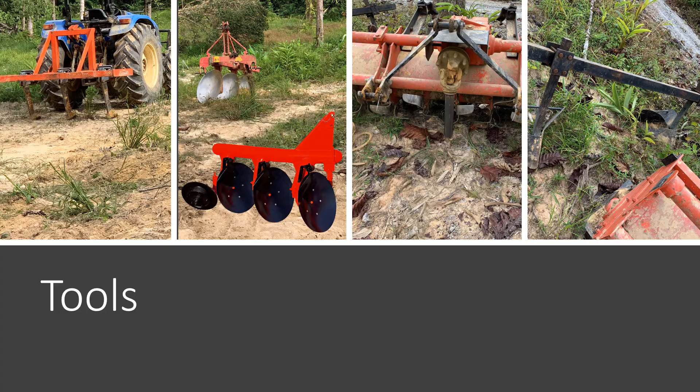The last one here is used in order to make a bed, to make a ridge. It's called a furrow ridger - the furrow ridger is used to make that furrow at the side of the bed. So you determine your size of bed, and you can adjust the width between these two blades. The width of the furrow is fixed because the blade here is fixed, but the size of the bed can be adjusted based on the width between these two blades. You'll see later on how this is going to be used.

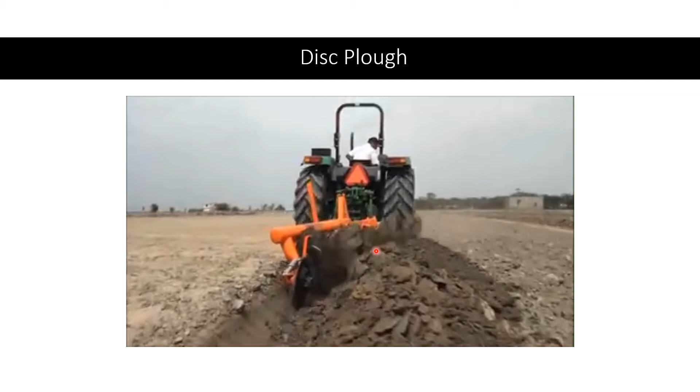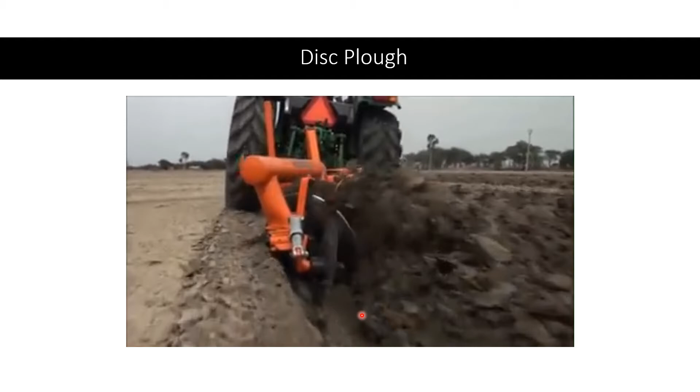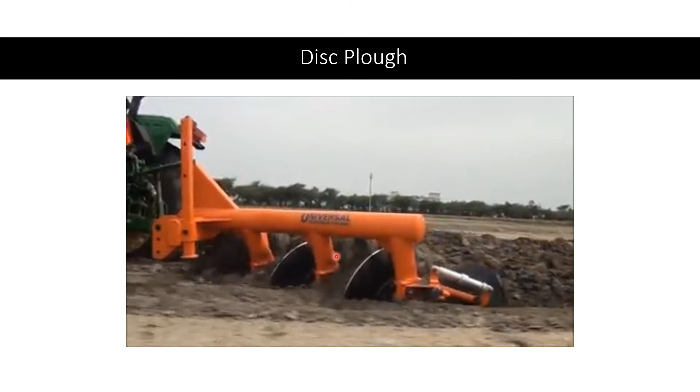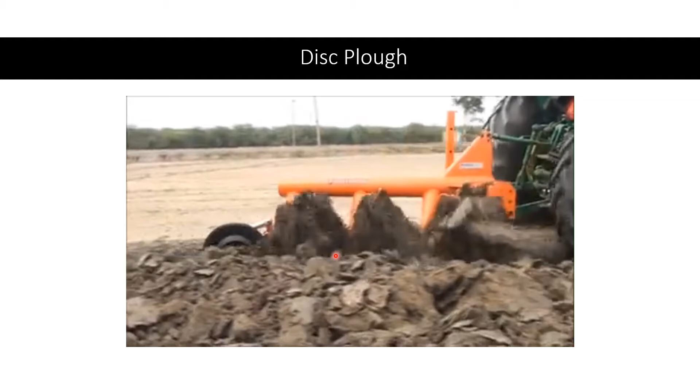So in this video, you can see how the disc plow works. It works by overturning the soil and digging - it digs and overturns the soil and breaks it down. If there are still some roots inside the soil, they will be cut off at this point, but not all. Most of it will be cut off and can then be easily removed by the chisel implement. You can see in this video how the soil is being overturned and dug.

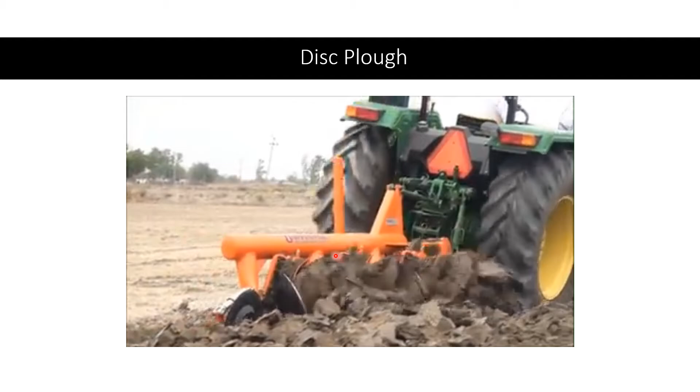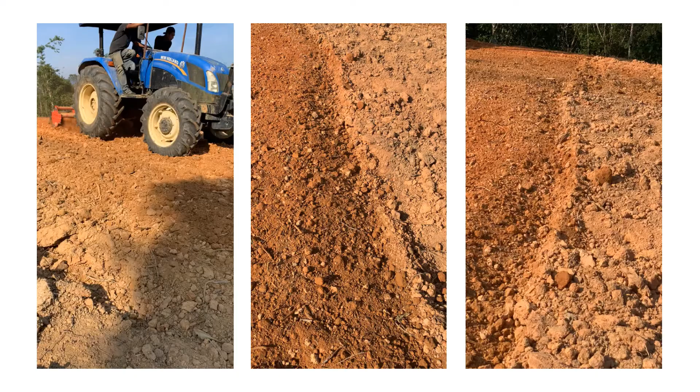Now we can collect all the big branches and put them on another stack. In this video you can see how the roto works - it's grinding soil into small pieces. That is the usage of the roto implement. In this second video, you can see the difference between soil that has been roto-tilled and the one that is not. You can see how this one actually breaks into loose soil, while this one is still compact and hard and in large pieces.

Same goes for this one - that's the difference between before and after.

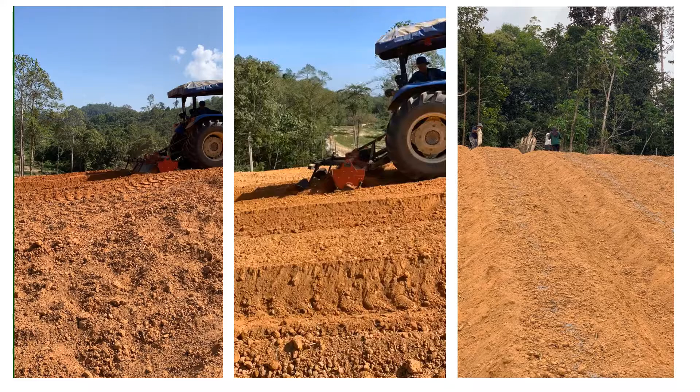After you do the roto, then you can put another implement right in front of the roto - so it's double now. You don't remove the roto implement, but you also put the furrow ridger up front of the roto, so it can still break down anything left, and at the end it will actually drag to form a ridge. You can see in the picture here, this is the furrow ridger and this is the roto - while it drags along, it actually will form a bed. So this furrow ridger will drag along and form the bed, and there you go, you have your planting bed.

So the size of the planting bed here is determined by the width between the two blades of the furrow ridger.